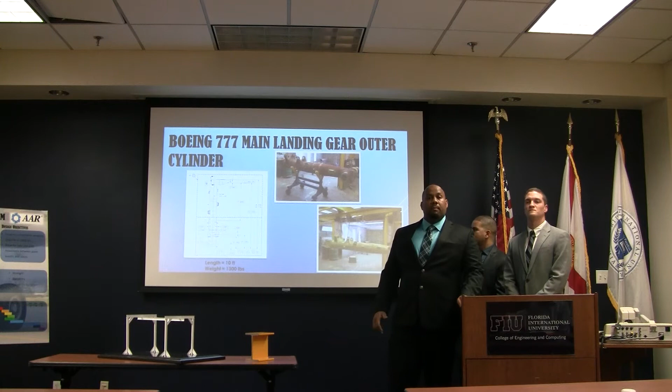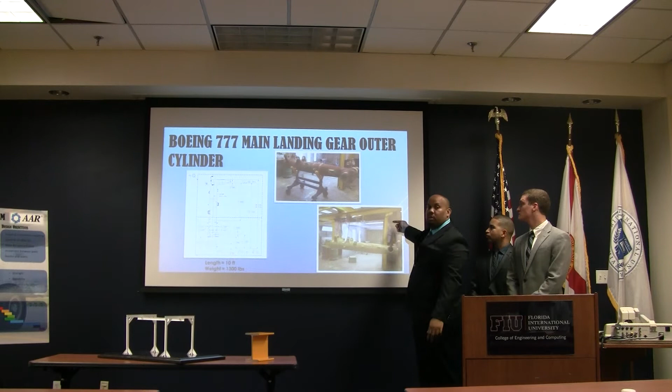Our motivation was the Boeing 777 main landing gear cylinder, which is approximately 10 feet in length and about 1,300 pounds in weight. Currently, AAR cannot hold the cylinder on the current shop track beam. You can see where they're holding the component, however it cannot be moved around the system, and it requires an extra hoist to hold it, so it cannot be moved by itself.

This is the current paint shop that we have. They have ovens, paint booths, as well as the track beam system. The cylinder itself takes 24 hours to get painted.

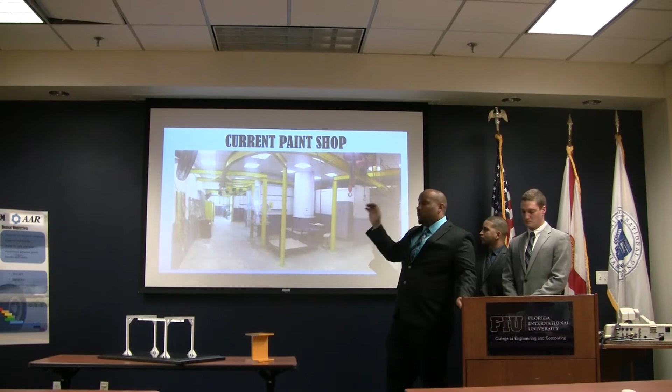So with our new design, we're going to be implementing it, and we'll present it more.

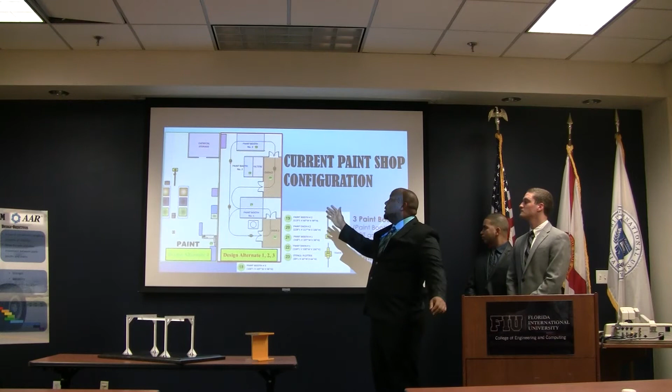This is a configuration of the paint booth system. Currently, for the paint booth system, our design alternates, we did 4 designs in total. The first 3 were actually done within the current paint booth, and the 4th was done adjacent to the paint booth. As you can see in the first configuration, paint booth number 2 does not have a track beam going directly to it.

So Joel will explain to you more about the alternates.

As Fabian just mentioned, the current problem with the paint shop is that the track beam cannot withstand all of the products that go through the paint shop. So AAR gave us the flexibility to not only construct and design a new track beam system, but also the layout of the actual paint shop.

Initially, we came up with 3 different alternatives for AAR, which actually utilize the current paint shop room as it is now. The problem with that is that the construction of any of these 3 alternatives would halt or affect production of the current system.

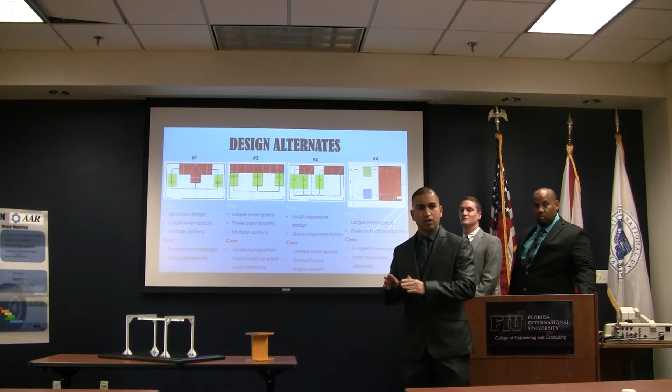So we came up with alternative number 4, which literally uses the space adjacent to the paint shop and will allow AAR to continue with its manufacturing and production without affecting it, while also constructing the new paint shop.

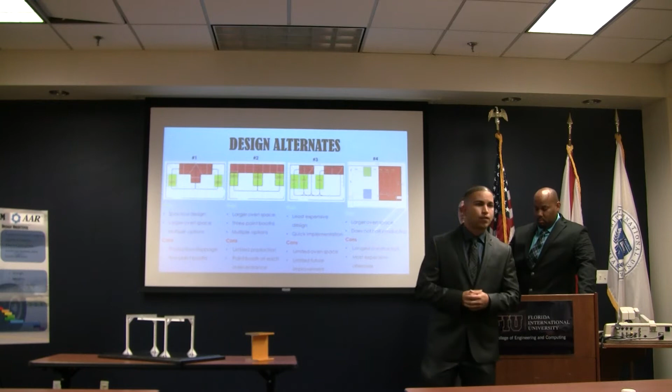As Joel previously mentioned, we agreed with AAR that design alternate number 4 was the best for their needs. As with any complex engineering problem, it was easiest for us to break this up into smaller sections. So we took the whole beam system and divided it into 29 different sections, either a straight section, a curved section, or a switch to switch between two different tracks.

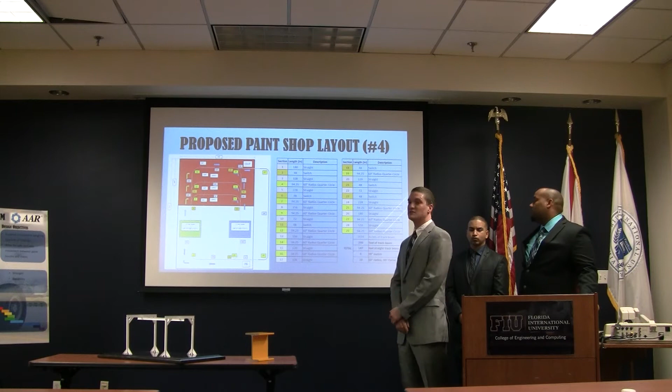In total, we have 290 feet of track beam, 187 feet of which are straight sections. We have 6 48-inch switches, and we have 10 60-inch radius quarter circles.

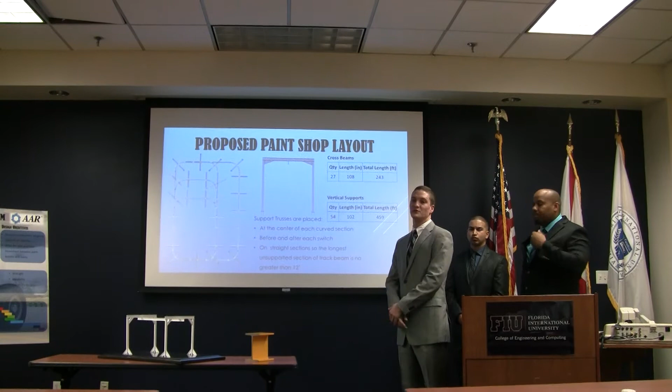In order to support our beam system, we need support trusses. The support trusses are going to be placed at the center of every curved section, before and after each switch, and on the straight sections, so that the longest unsupported section of track is no longer than 12 feet.

Each support truss consists of a crossbeam on top and 2 vertical supports. We have 27 support trusses, so we have 54 vertical supports.

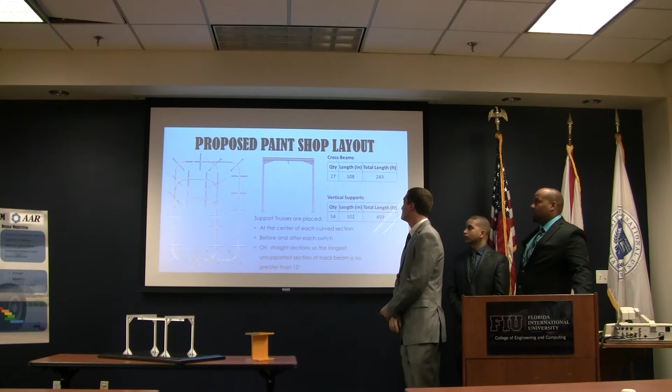The first step in our track beam analysis was to determine a design factor. The design factor is important to account for larger pieces that we may encounter in the future, as well as for any unaccounted forces that we may have simplified. It really depends on the purpose of the system and is ultimately up to the owner's specification. We agreed with AAR to use a design factor of 4.0 for our design.

The next step was to determine the total vertical load that we expect our system to experience on a single 12-foot unsupported section. So we took the weight of the heaviest component, which is 1,300 pounds, and multiplied that by our design factor.

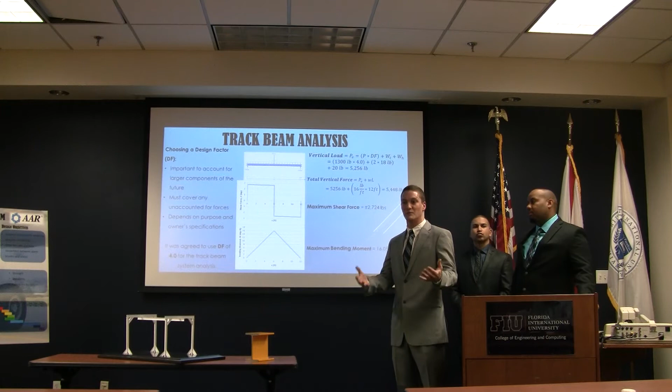We also include the weight of 2 trolleys and the weight of any hardware hooks or slings associated with that, which we estimate to be 20 pounds. In calculating the total vertical force, we also need to include the weight of the beam itself. The beam we ended up choosing is 16 pounds per foot, so we add 16 pounds per foot times the 12 feet, and we get a total vertical force of 5,448 pounds.

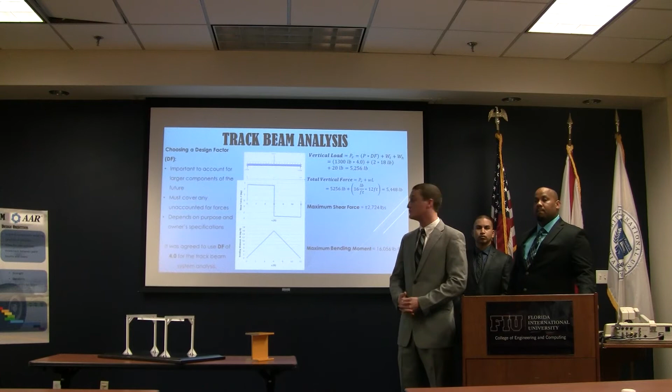Once we have the total vertical force, we can calculate the maximum shear force, which was plus or minus 2,724 pounds. We can also calculate the maximum bending moment, which was 16,056 pound-feet. Once we have the maximum bending moment calculated, we can plug it into these equations to calculate the actual stresses on the beam in both the X and Y direction.

Once these are calculated, we need to figure out the allowable stresses. The Crane Manufacturers Association of America provides guidelines for compression, tension, shear, and bearing stress based on the yield strength of the material. All the beams we analyzed are A992 steel, so the yield strength is 50 KSI, which gives us these values for allowable stresses.

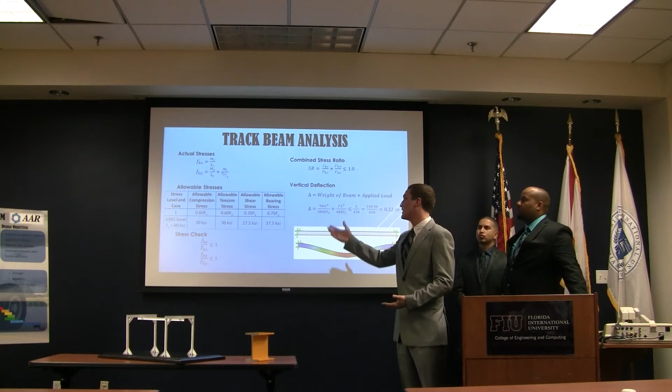The next step is to compare the actual stresses to the allowable stresses. We do that in both the X and Y direction, making sure this value remains equal to or less than 1. We also calculated a combined stress ratio by adding both the X and Y direction ratios together, and we want to make sure that also remains less than or equal to 1.

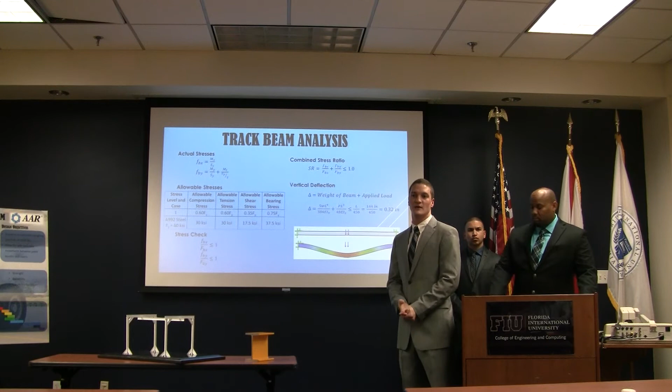Our next step was to check the vertical deflection of the beam. In checking deflection, we need to include the weight of the beam and also the load applied at the midspan. The first term is for the weight of the beam, and this term is for the applied load. As per CMAA, it's important that this remain less than the total unbraced length divided by 450. In our case, since that's 12 feet, that gives us 0.32 inches of maximum allowable deflection.

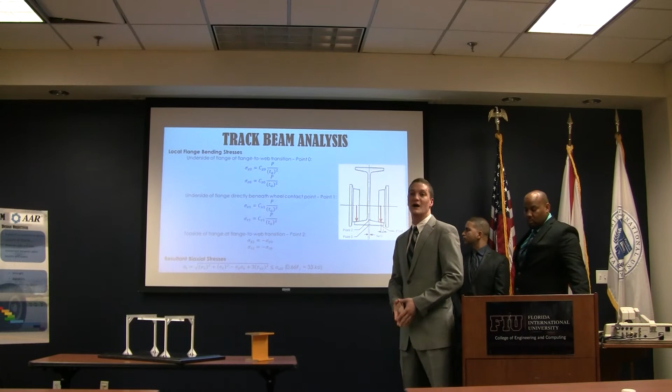Due to the fact that the trolley wheels are applied on the bottom flange of the I-beam, it's very important to also check for local flange bending. We can use equations provided by the Crane Manufacturers Association of America to check at 3 critical points as shown in the picture here. Once we calculate the stresses, we can calculate the resultant biaxial stress at each point, and it's important that this value remain less than or equal to 66% of the yield strength, which in our case would be 33 KSI.

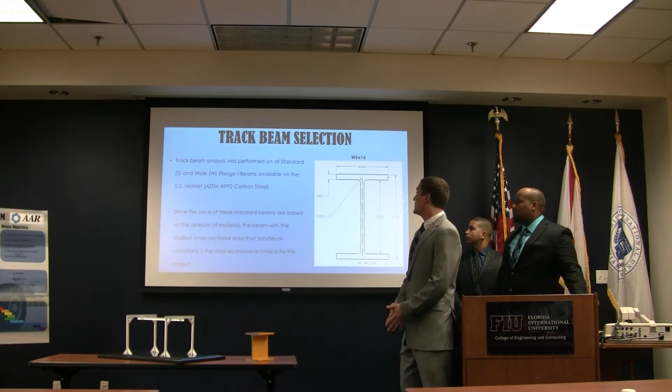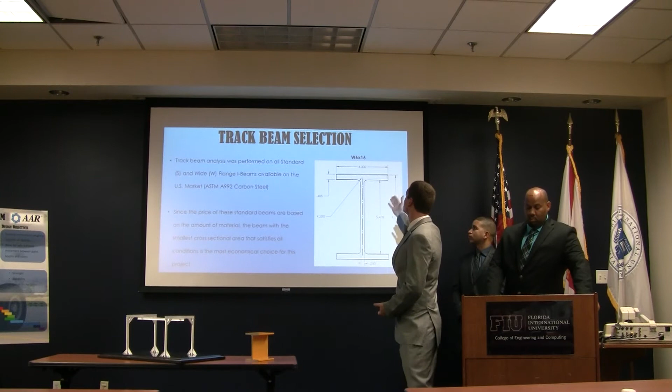So we performed this track beam analysis on all standard and wide flange I-beams available on the U.S. market. All these I-beams come in A992 carbon steel. Since the prices for these beams are determined by the amount of material that goes into them, being standard beams, the first beam with the smallest cross-sectional area that satisfies all previous conditions I mentioned would be the most economical beam for our design. In our case, that's the W6x16, a wide flange I-beam, about 6 inches tall and 16 pounds per foot. We actually have a 6-inch section of it right here.

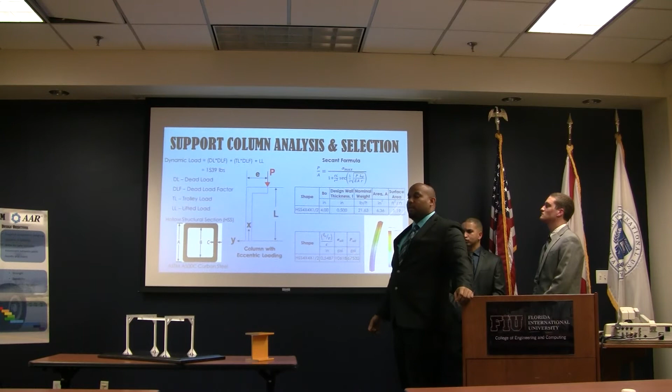Okay, so then after we did all this calculation to get the lateral and horizontal load, we had to do the support column analysis. Doing the support column analysis, there will be movement to the part, so we had to do a dynamic load analysis. We took into consideration the dead load factor, the dead load, the trolley load, as well as the lifted load. And we used an eccentric column loading, secant, using the secant formula.

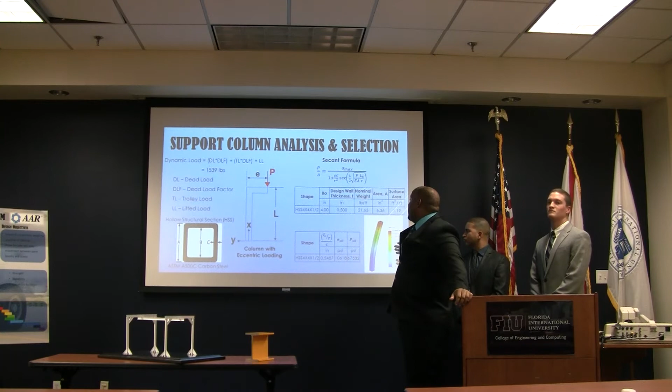We selected the hollow HSS support tube. The HSS support tube has an ASTM A500C, which has a yield of 50,000 PSI. With that, after using the secant formula, we selected the 4x4 by a half, which gives us a P allowable of 67,532. As you can see here, this is actually what the SolidWorks simulation did, and we'll go into further details.

Since this is a self-supporting system, we wanted to add to the rigidity of the system in any way possible, so we decided to add gusset plates and base plates to the design. In doing so, we followed the LRFD method, the load and resistance factor design method given by AISC, the American Institute of Steel Construction.

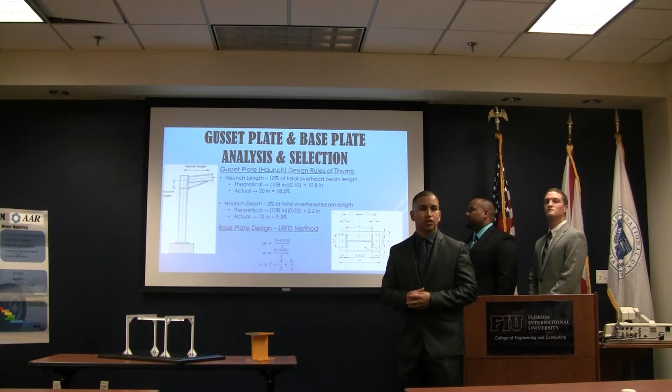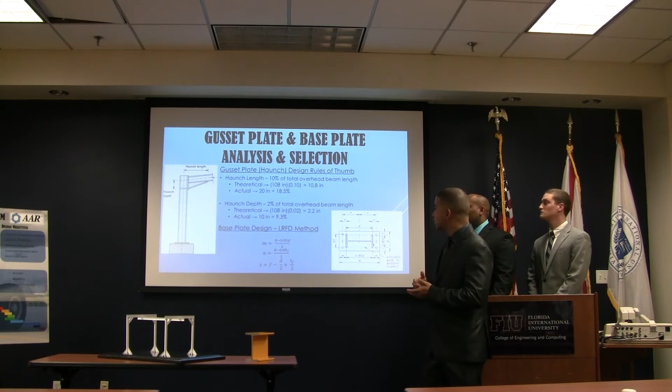We use the rules of thumb given by them, which give a haunch length of at least 10% of the overhead beam length. For us, the overhead beam length is 108 inches, so 10% of that is 10.8. Our design has a 20-inch haunch length, well within guidelines. The haunch depth is required to be at least 2% of the overhead beam length, theoretically 2.2 inches, and our actual design is 10 inches, so that also gives within guidelines.

For the base plate, we used given equations by the AISC, and used those to determine the dimensions of the base plates.

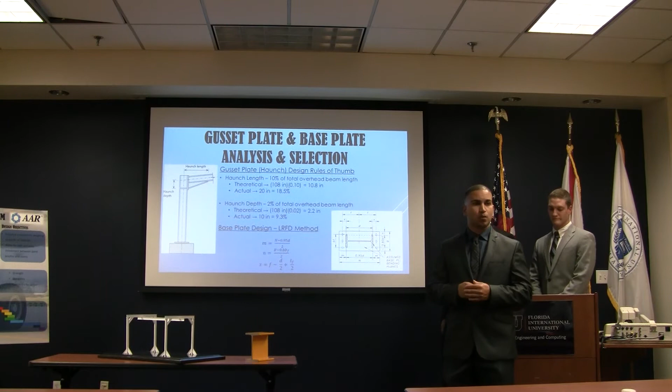So we had to do a prototype due to the fact that codes such as Miami-Dade codes are going to prevent us from implementing the system. So therefore, we did 2 prototypes.

We did a 1 to 12 prototype, which you can see here. This is actually just displaying exactly how it will look, the support of it, a section, or unsupported section.

We did a 1 to 6 prototype, which we tested at the 1:6 scale. We applied 320 pounds, which is equivalent to 1,477 pounds. On the track beam system, we did 24 inches.

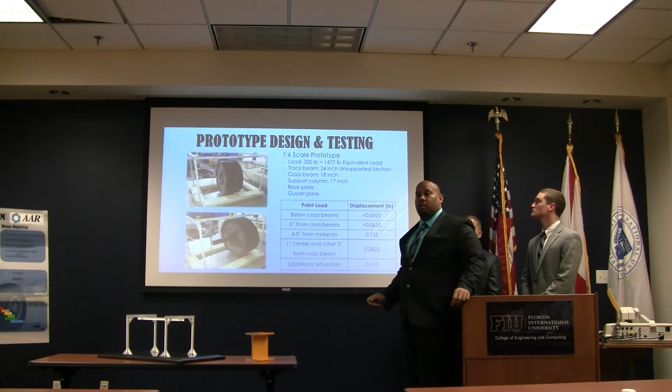This track beam system is actually 24 inches, which simulates the 12-foot unsupported length. The cross beam, this section right here, is 18 inches, which supported the 9-foot length, and 8.5 feet, which is the support, and the gusset plates right here, and then also the base plates.

After doing that, we did the point loads. For the point loads, we did 4 different point loads at 4 different sections. First, you can see this is at the mid-span.

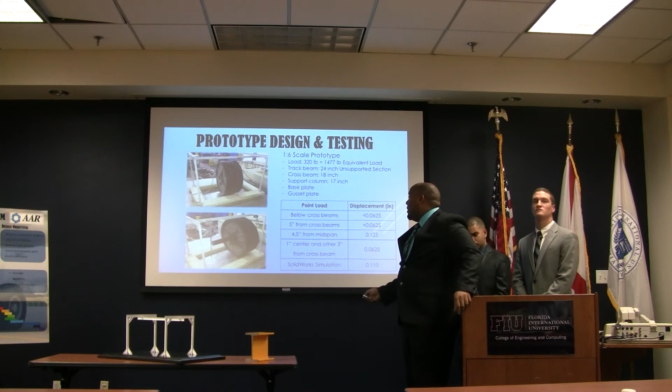We tested 4.5 inches from the mid-span, getting a maximum deflection of 0.125. In this section, we did 1 inch from the center and 3 inches from the crossbeam, giving us 0.0625. The other 2 sections, directly below the crossbeam and 5 inches from the crossbeam, gave us values way below because we were using tape measures.

For the SolidWorks simulation of this section, the result showed a maximum deflection of 0.110.

After we selected every single thing, such as doing the testing, we also did the selection for the support tubes, the support sections, and did a final cost estimate.

Being that we had to do the complete paint shop, we had to do area preparation for the section that is going to be used. We had to remove, for instance, the hazmat room needs to be removed, there is a computer server that needs to be removed, and demolition of the storage closet, which is going to give us a price of about $48,000.

Materials such as the paint booth, the track beam, the cross beam, support columns, oven lamps for the oven will be about $277,000. Fees such as general contractor and engineering fees, due to the fact that we are not legally licensed and cannot sign off on anything, we have to get an engineer, run with contingency, giving a grand total of about $480,000. We estimated contingency at a price of 10%.

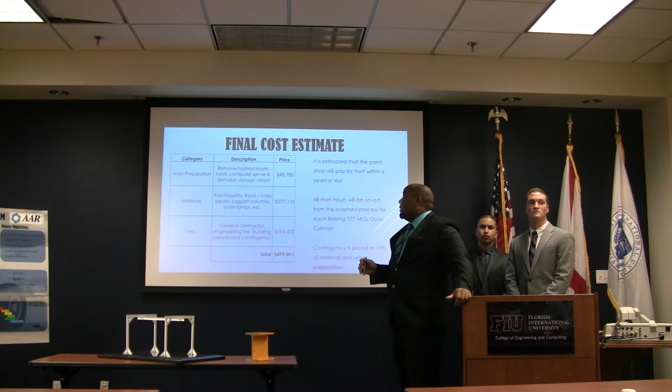So in case anything might show up, it will be covered due to the material and the area preparation. It's estimated that the paint shop will pay back for itself within 6 years, due to the fact that if AAR received 10 ship sets of 777 support systems, they will save 48 man hours per ship, per gear, per component, which is going to pay off for itself for $480,000.

Okay, as with any major engineering project, we are going to take into consideration any challenges. These are a list of challenges that we took into consideration. Most notably was safety. In our design, we implemented it so that any paint removal or any scuffing is taken away from the actual paint booths. So any safety for hazmat areas or spray is taken into consideration.

Also, for any workers at AAR, we took into consideration that the system has to support itself no matter what. So the safety of the workers is taken. And also, the final product of this AAR facility is the landing gear systems. So any customers of any commercial flights will be taken into consideration and dealt with here.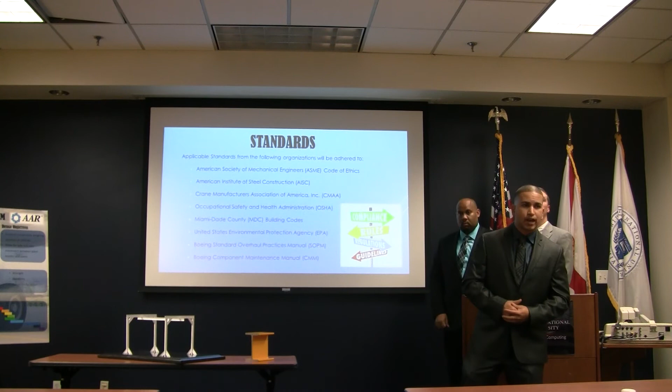This is a list of organizations that we use standards from. Most notably was the American Institute of Steel Construction, or AISC, and also the Crane Manufacturers Association of America, CMAA. Those two really gave us the most guidance and guidelines in our project.

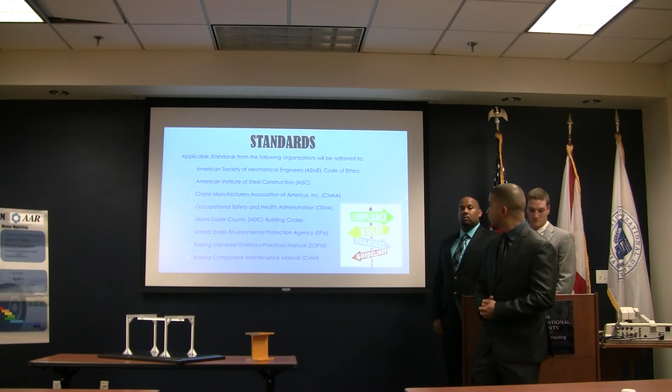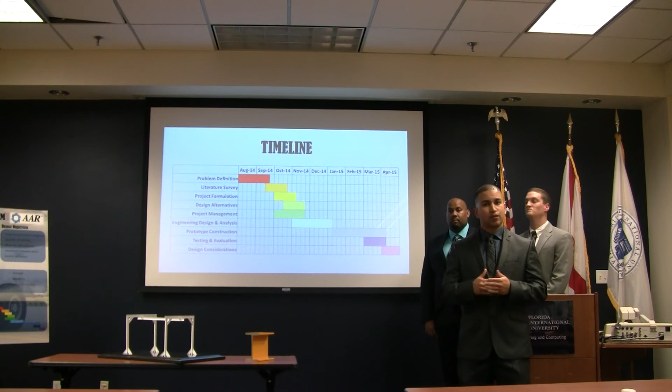Team responsibilities: we each were responsible for our own division of the project, but we worked as a team as well, and we helped each other out and finally got the project completed successfully. The timeline: we generally stayed on time with everything that we were supposed to complete, and we have presented to AAR, and they're in accordance with our project.

Global learning: AAR has a similar facility in Malaysia, so we believe that they can use this design and this layout for any purpose that they deem necessary. So we believe that they can use this in Malaysia as well. Also, safety. We did come up with a bilingual safety manual for the track beam system in English and Spanish, which are the two predominant languages in South Florida.

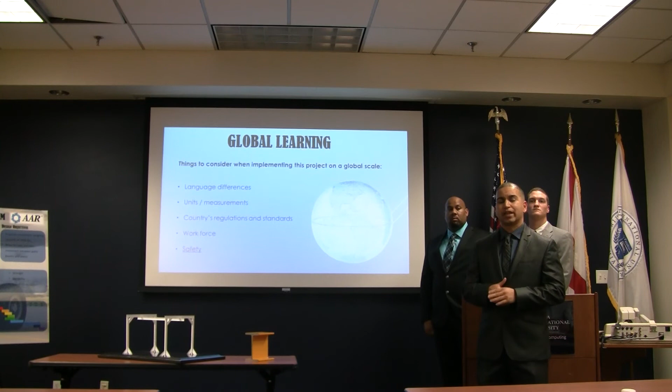And in conclusion, we will allow AAR to safely and efficiently move the next generation of larger airplane components through the paint shop, and any future work can take into consideration air circulation, the thermal efficiency of lamps and ovens, and any other components deemed necessary. And that concludes our presentation. Any questions?

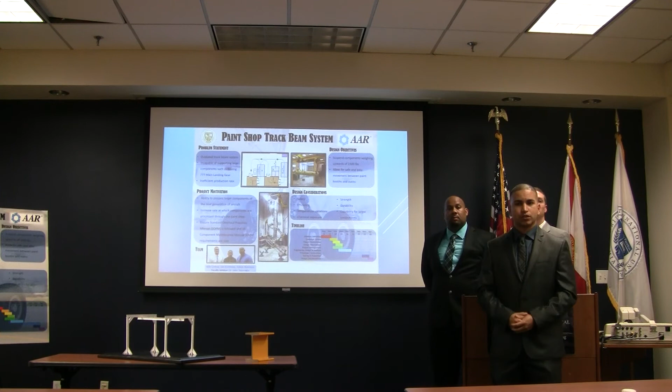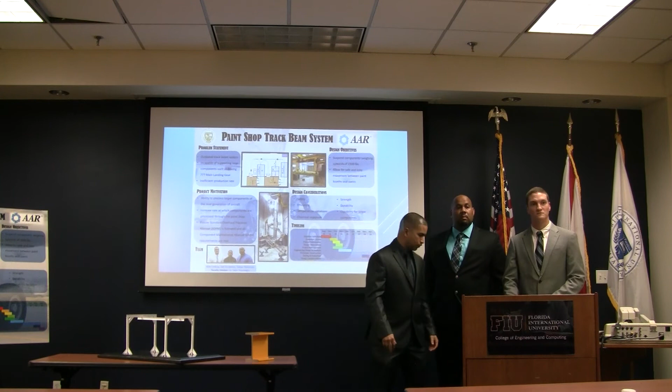You did a simulation of the straight section of beam. Have you done any simulation of the bends? No, we did not do simulations of the bends because we decided that we were going to support every bend in the center of the bend. And since it's only a 5-foot radius, the 12-foot unsupported section would be much more likely to fail than that.

Okay. And also the design of the base plates is more theoretical than analytical. So as I mentioned, the LRFD method, which is given by AISC, is designed more on the dimensions of the actual plate instead of going off of load.

Before you got this project, had you ever seen a paint shop track beam system? Yes, I actually did because I currently work there. Oh. Yeah, he works there. Honestly, I had no idea what it was when he told me the project for us is the paint shop track beam. I had to go there and see it myself. From scratch, but correct.

Yes. That's why we really wanted to bring a small section; even though it's not to scale in strength, at least it's to scale in size, just so you can get an idea of what we're talking about here. Yeah, we learned a lot. It seems very simple, but there's a lot of work that goes into it.

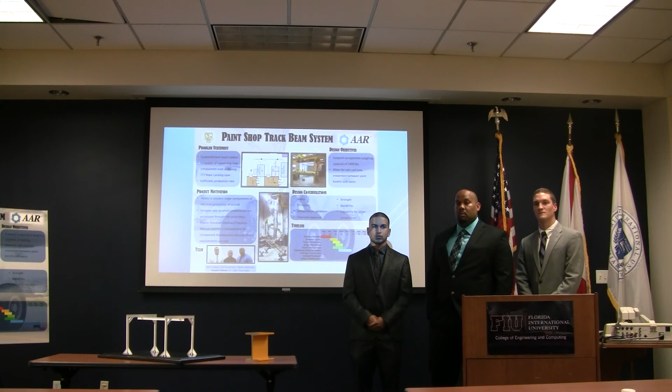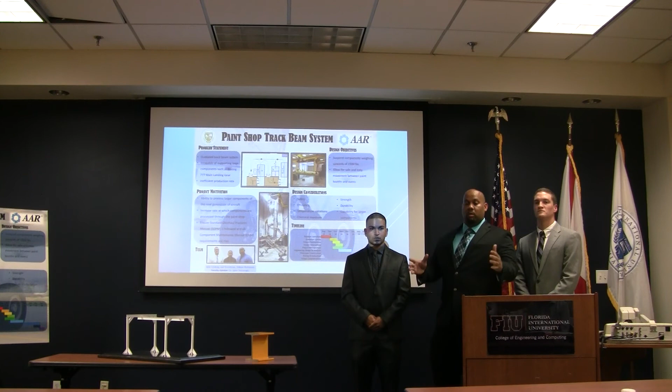Yes, that's correct. So my question, as a follow-up to that, is have you considered scalability? Now that you've improved their process and their efficiency, have you left them with the ability to add another paint booth or another track system to further scale that system? Right. So they're limited in space. That was a major engineering issue that we had. The first designs, we did it within the current paint shop. It was going to prevent production. So they only had one section outside. That's where you're going to do a preparation to remove all that section and put a paint shop. So you kind of limited the space for future growth.

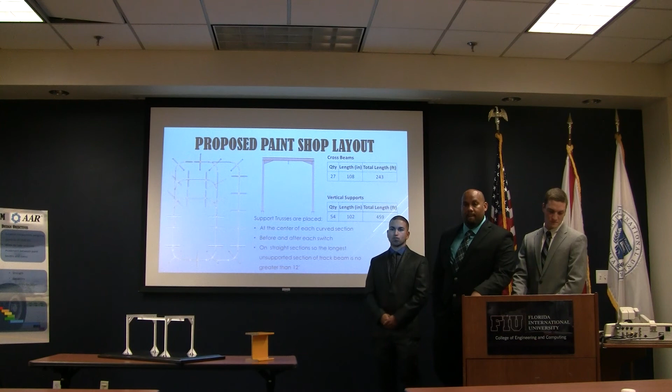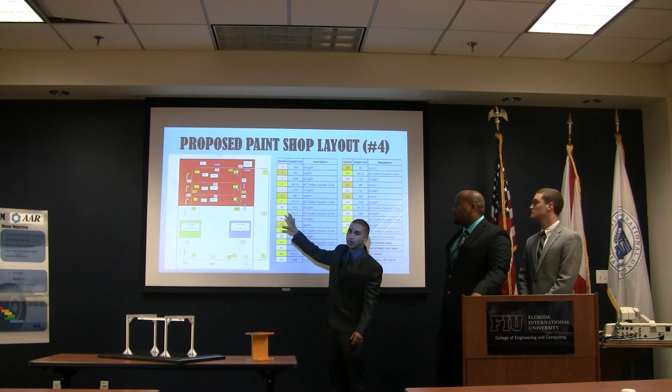What I'm saying is, is it scalable to the current paint shop, so they wouldn't have to demolish or repurpose it, but could actually integrate it into the new setup? Yes, definitely. We actually have a beam section. See this one? This is inside the current paint booth room, and there's a wall here that separates it. This is the scuffing area, so it doesn't contaminate the painting area. So all of this area is the current paint shop right now. So if they deem it necessary to use that, it's up to them.

Quick question also in terms of scalability. Based on your learning experience, can we take this process and use it for an equivalent airplane like the Airbus 340? Yes, the A340 landing gear components. This is not scaled for a complete airplane, but for landing gears, yes. Currently they have the A340, A380, the whole Airbus fleet, and going forward, they're going to the A350, which is smaller; they're going more fuel efficient, smaller components, lighter weight. But this is currently the largest on the market.

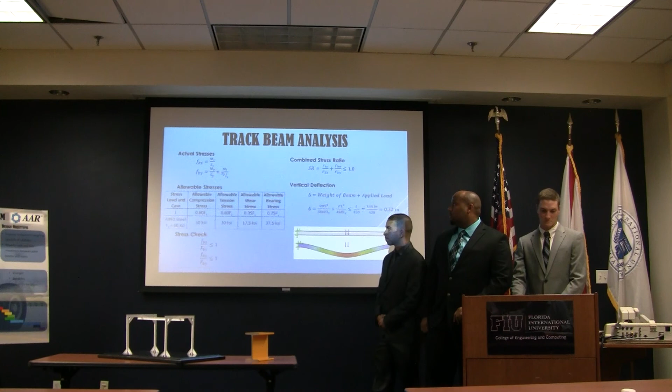Is there a return on investment concern, being 6 years instead of like 1.5 or 2 years? They didn't mention that they needed to get it done immediately, and since we're estimating 1 shipment per month and it hasn't ramped up yet, it's actually going to be done in less than 6 years. The cost that you've listed there, close to $478,000, how close is that to the estimate that AAR was willing to put out? We provided this to AAR, and they were 100% with it. They were expecting $600,000 and some thousand because of their plating shop, but the plating shop has more chemicals, so there are more fees.

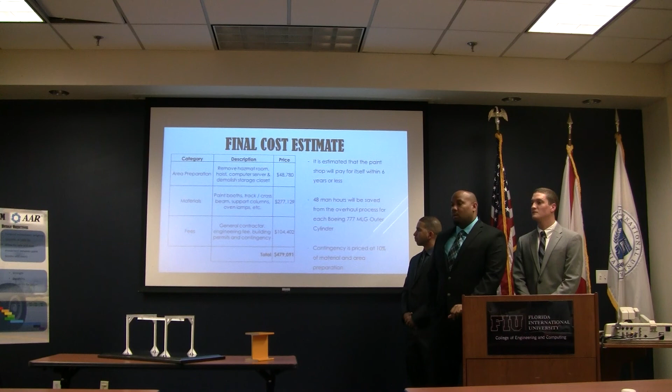I have one other comment. You're looking at 48,000, 277,000, and then is that $104 or $104,000? Oh. I was gonna say, you really undersold yourself. I'm sorry, I don't have my glasses. No problem. Yeah, we noticed. Any other questions?